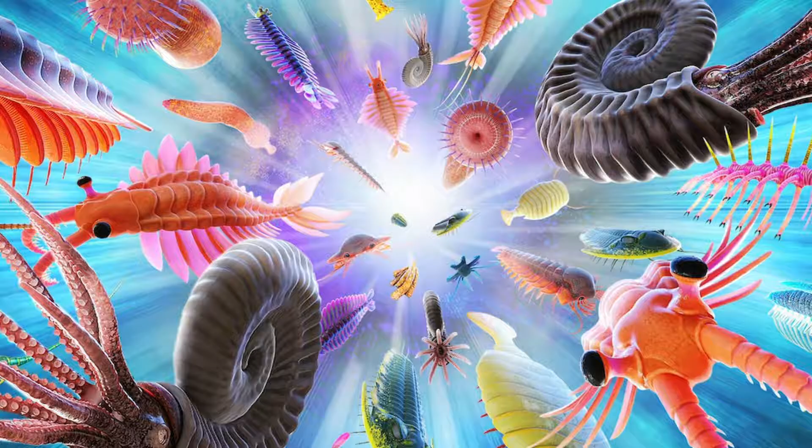Since the Cambrian explosion 520 million years ago, creatures such as Diania cactiformis, or the walking cactus, have developed external exoskeletons to protect them from the concurrent rise in predation at the time. Arthropods quickly followed suit, securing their place as the most abundant animal group on the planet.

Approximately 520 million years later, in 1847, Sir Richard Owen coined the term exoskeleton to describe the external covering of invertebrates for support and protection.

Unfortunately, for larger creatures, muscle strength doesn't scale proportionately with size. And because the relative weight of an exoskeleton is much greater than that of an endoskeleton comparative to a creature's size, at a certain size, exoskeletons become too heavy for a creature to move efficiently, and therefore rarely survive the process of natural selection in animals larger than the crab.

Except in the case of Arthropleura, but luckily for us they've been extinct for 290 million years, so we never have to think about them again. Because of this scaling inefficiency, it took a few decades after Sir Owen's popularization of this concept for the first exoskeleton designs to find their way into the patent office, where the best of capitalism's technological progress can be found.

The year is 1890. Alice Sanger has just become the first female staffer in the White House. 24 tornadoes appear in Mississippi, killing over 146 people, and the Sleeping Beauty Ballet is premiering at the Imperial Mariinsky Theatre in St. Petersburg. Just down the road, a young inventor by the name of Nicholas Yagn has just patented

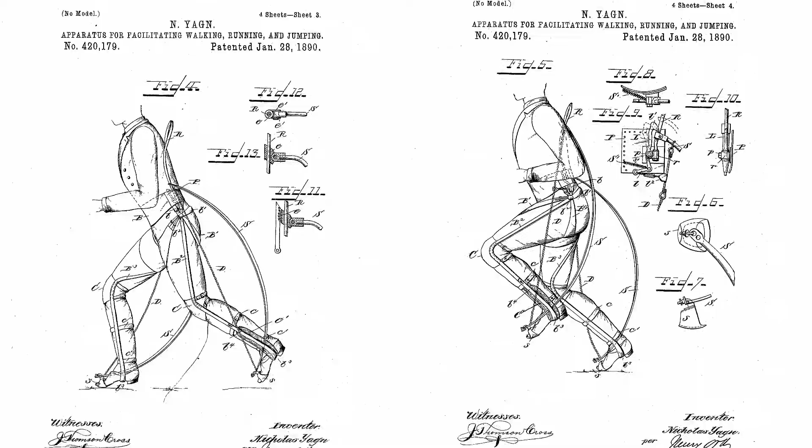the first recorded design of an exoskeleton, a lower limb exercising apparatus employing a leaf spring operating in parallel to the legs to augment the operator's ability to run faster and jump higher. In a sense, Yagn had attached an archery bow to each leg.

Though initially unpowered, Yagn's designs marked the first foray into technical augmentation of human abilities, and a later patent in the same year saw compressed gas bags to store the energy attached to the back, filling as the foot falls, creating pressure in the bag, then said pressure being released as the operator lifts their foot from the ground.

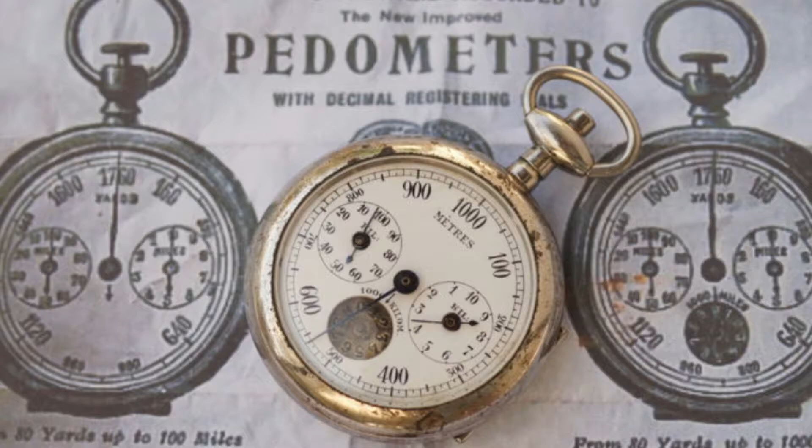27 years later, in 1917, Leslie C. Kelly patented her improvement on the pedomotor, or walking machine. The proposed design provided relief to muscles during running using a small steam engine worn on the operator's back. The artificial limbs worked in parallel with the human's limbs, like Yagn's apparatus, but were directly connected to the power source. However, this design was never released, and it would take another 40 years for an update to be released in this emerging field.

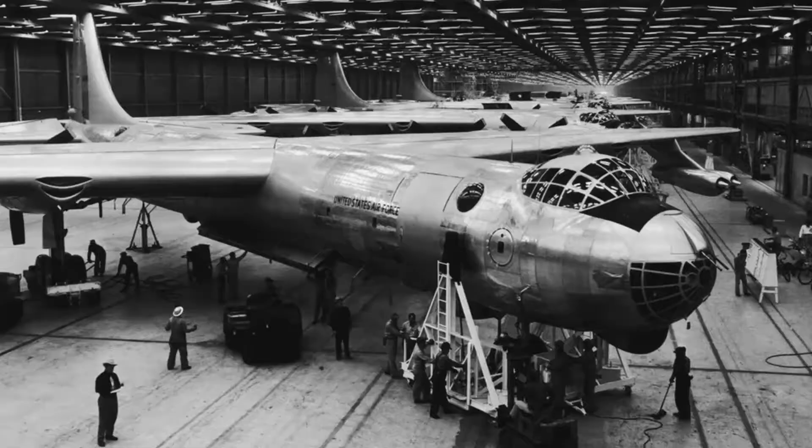In Schenectady, New York, 1946, the Atomic Energy Commission and the United States Air Force began their joint AEC-USAF nuclear propulsion program to determine the feasibility of nuclear energy for the propulsion of aircrafts.

Unfortunately, at the time, nuclear reactors ranged from the size of a truck to the size of a large truck, and so the General Electric Company, or GE, was hired to take these experimental designs and make them a reality in the form of a modified Convair B-36 Peacemaker, a high-tech strategic bomber, chosen for its abnormally long wingspan, clocking in at 230 feet, or 70 meters.

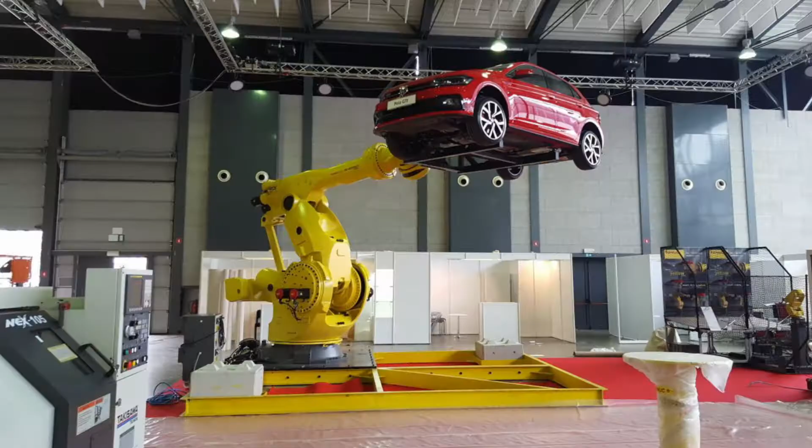During these atomic experiments, General Electric were burning through their government-issued super soldiers to lift their nuclear equipment, so they began development on a tool that would allow the engineers to handle heavy and potentially volatile equipment with greatly amplified strength without sacrificing their dexterity. GE called these new tools CAMs, or Cybernetic Anthropomorphous Machines. But after 12 years of development, they always ended up too clumsy and inefficient for practical use.

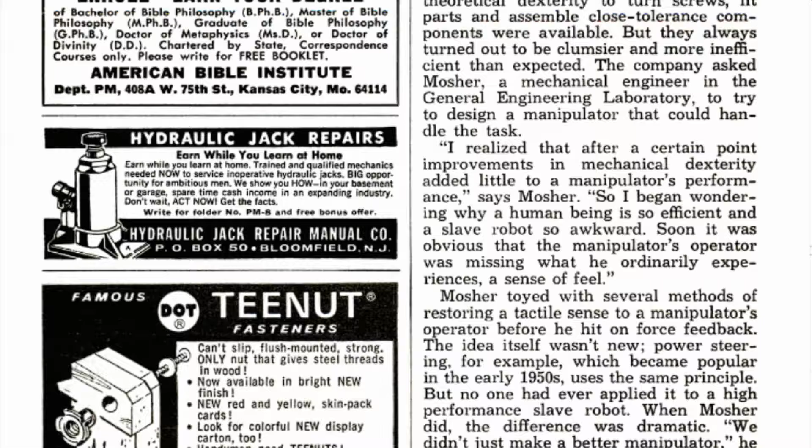Enter Ralph S. Mosher, General Electric lead engineer and the father of powered exoskeletons. To this partial failure, Mosher said, "I realized that after a certain point, improvements in mechanical dexterity added little to a manipulator's performance, so I began wondering why a human being is so efficient and a slave robot so awkward. Soon it was obvious that the manipulator's operator was missing what he ordinarily experiences, a sense of feel."

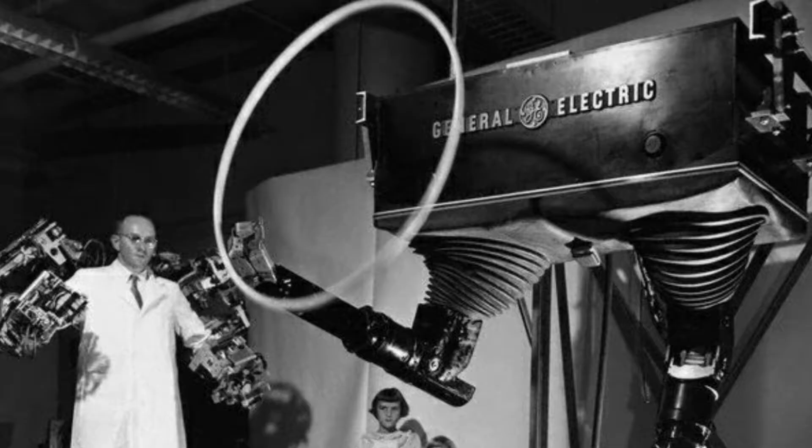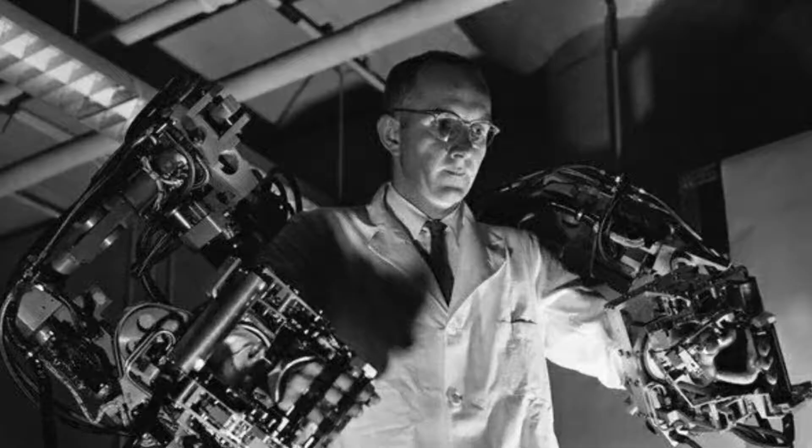And with further funding of the AEC-USAF nuclear propulsion program, Mosher revealed the Handyman, a pair of claw-tipped robotic arms hooked around the operator's shoulders. The Handyman met all the requirements General Electric wanted from their cams: strong enough to crush golf balls, sensitive enough to pack eggs, and dexterous enough to light matches.

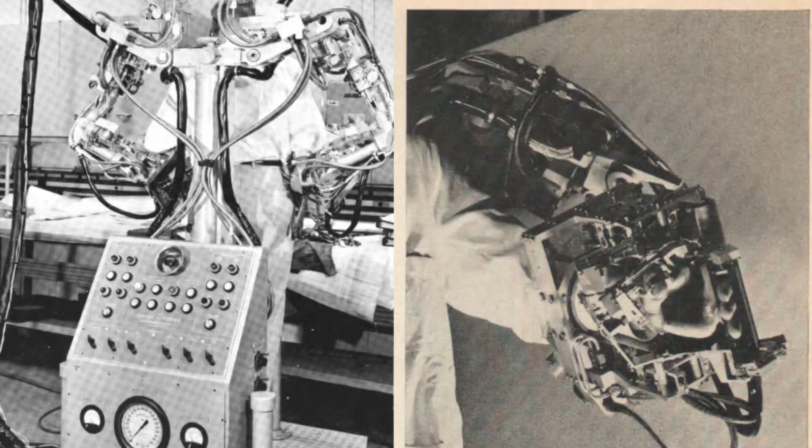Despite this incredible advancement, the Handyman had its drawbacks. The force feedback electronics were bulky and complex, with heavy robotics attached to both external machinery and the operator's back. The servos and racks were highly specialized and inordinately expensive, unable to be produced to any noticeable scale. These drawbacks and the current technology prevented any feasible or realistic plans for continued development.

The US military, best known for their rambunctious attitude, tactical military operations and impressive budget, has a history of unique expenditures, consistently attempting to blur the line between reality and science fiction in the name of security and defense. One such foray into the future was their continued funding of General Electric's work, with Mr. Mosher at the lead, who too was discovering his passion for expanding the limits of human capabilities.

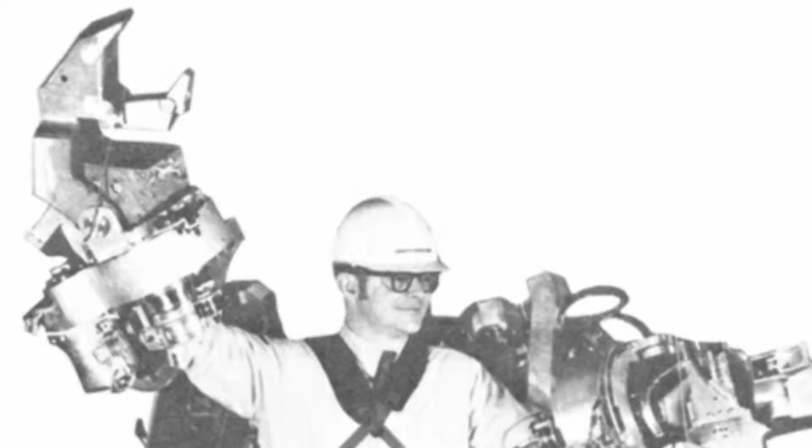Starting in 1965, Mosher began his work on the Handyman's successor, the Human Augmentation Research and Development Investigation Man, shortened to the Hardiman. During the first year of research, Mosher focused on human factors to provide machinery with human-like action that mimics an operator's natural motion. The original design incorporated an internal exoskeleton to record movement attached to the operator, and an external exoskeleton to recreate the operator's movement. Each internal exoskeleton joint had a duplicate on the external exoskeleton, geometrically superposed so that the corresponding joint axes are approximately collinear.

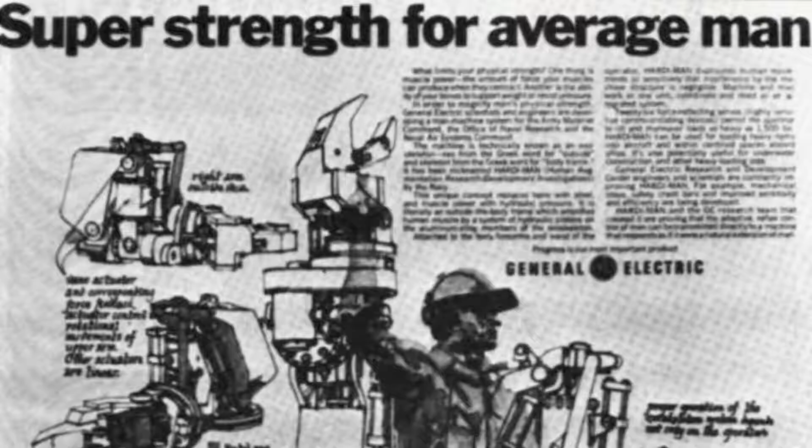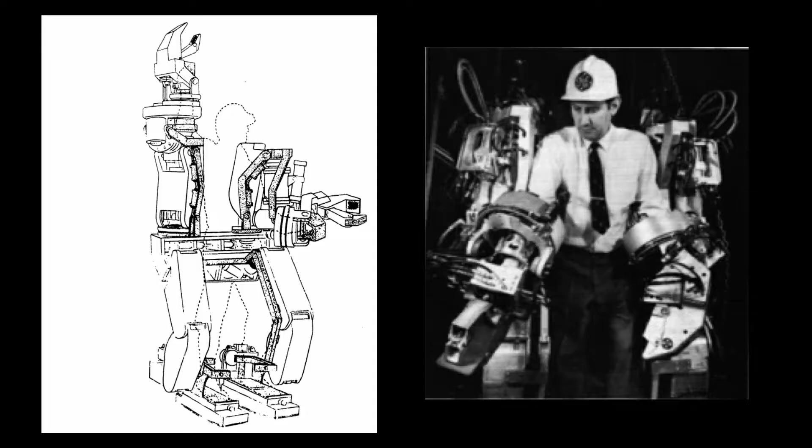To reduce forces experienced by the operator, the Hardiman used large bilateral servos reflecting the movement of the operator onto the external exoskeleton, and reflecting the working forces back onto the operator reduced by a factor of 25, so the operator can sense the forces on the machine as it's working. The design possesses no complex controllers, a large issue with the Handyman, or exposed limbs, as the operator stands inside the structure, surrounded and protected by it.

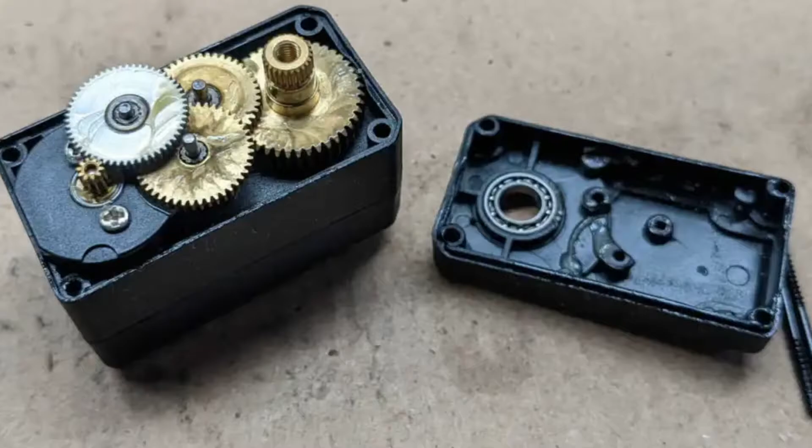It was after this first year it became clear to Mosher that the arm and leg systems must be split up due to practical considerations related to the build-up and compliance of servo systems. Problems with these servo systems continued, as GE had not yet succeeded in developing a complete hydromechanical servo system to the point where it could handle the exoskeleton's requirements.

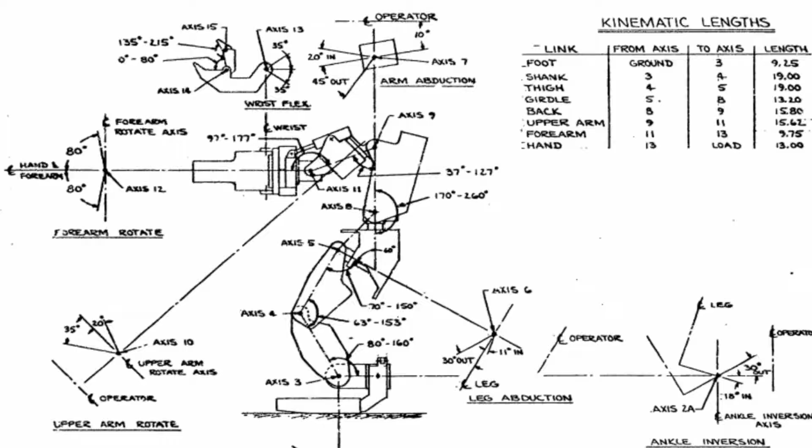Because of these issues, the Office of Naval Research, who was also involved somehow, directed the program to focus on the arm systems, as it involved lower risk, and Mosher recognized that a demonstration of its success was essential to continued support of the program, and by the end of 1969, they were finally complete.

Following this success, in the early 70s, the leg system was almost finished, and although initial tests were encouraging, funding was running out, so the final product was presented, which achieved limited success in walking. The machine responds to the man's motion, but the operator could not balance or walk without external support.

In his paper on the project, titled Handyman to Hardiman, Mosher stated, 'In spite of these achievements and the expectation for continued progress, the difficulties of duplicating many feats of the human brain and nervous system still remain formidable. Consequently, many mechanical operations will not be automated for some time.'

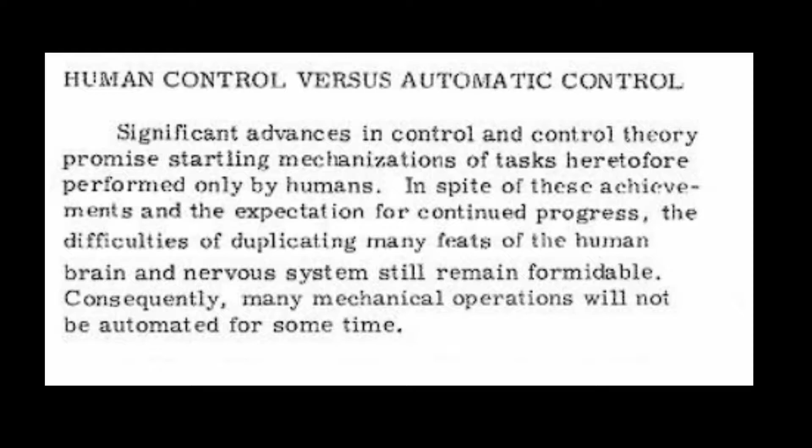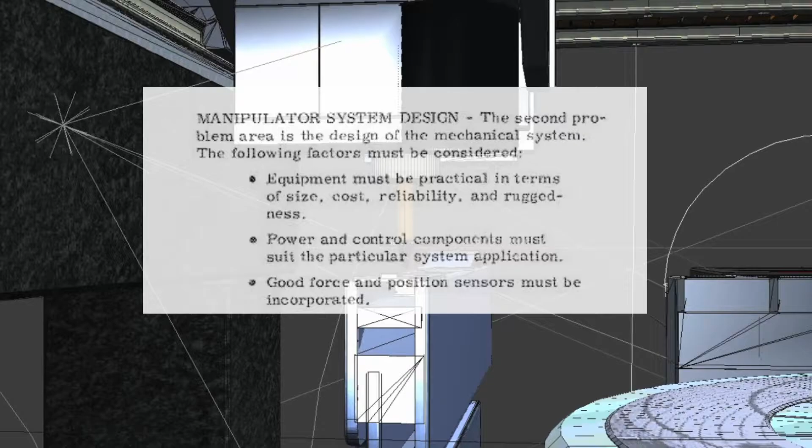He then went on to identify 4 key factors to be considered when designing powered exoskeleton systems. Number 1: Equipment must be practical in terms of size, cost, reliability, and ruggedness. Number 2: Power and control components must suit the particular system application. Number 3: Good force and position sensors must be incorporated. Number 4: Mechanical arm kinematics must be appropriate and adequate.

Although these factors are fairly broad, they set effective base rules for the design and production of exoskeletal systems, still followed to this day. Later in the paper, common usage of these systems were described as being for military use, bomb handling and heavy loads.

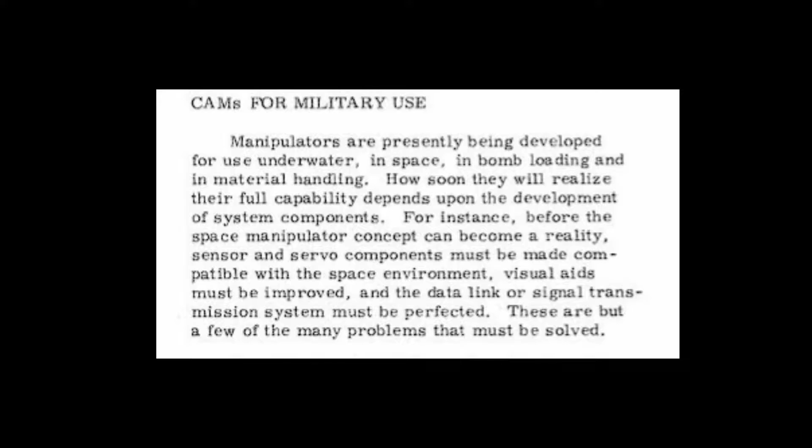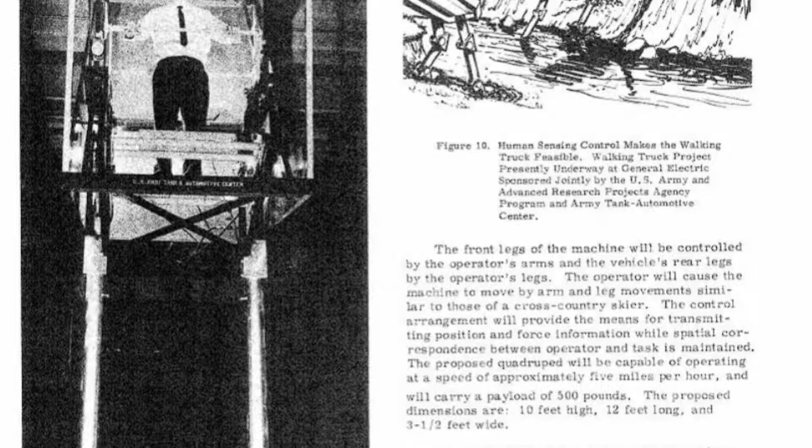Mosher unveiled a bonus system in the form of the walking machine, standing 10 feet high, 12 feet long and 3.5 feet wide. These quadruped monstrosities would travel at 5 miles per hour and carry 500 pounds of load, with the front 2 legs controlled by the operator's arms and the back 2 controlled by their legs.

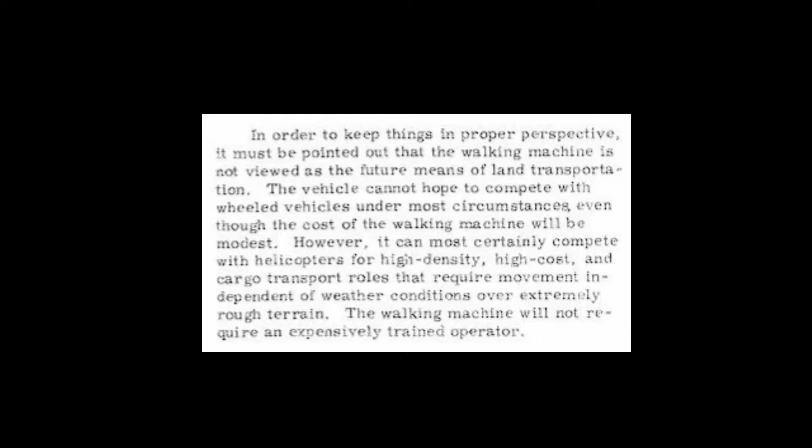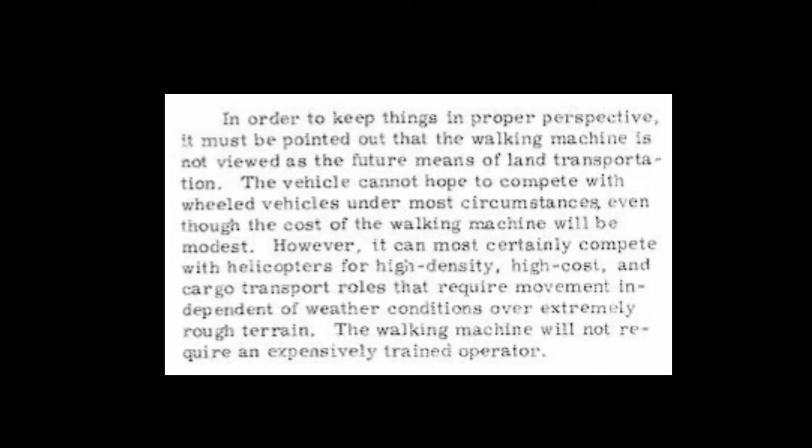To clarify his sanity, Mosher went on to say, 'In order to keep things in proper perspective, it must be pointed out that the walking machine is not viewed as the future means of land transportation.' And then inexplicably he goes on to say, 'It can most certainly compete with helicopters in cargo transport roles that require movement independent of weather conditions over extremely rough terrain,' touting its ability to be piloted without expensive training and its relatively modest production costs.

Mosher continued to predict that in the future, the Hardiman's operator will react in such a natural manner that he subconsciously considers the machine as part of himself. He continues, 'It is conceivable that a 20 or even 50-foot tall Hardiman can be built with the operator inside as the brain or controller, with force and position information being scaled down accordingly,' which is wild.

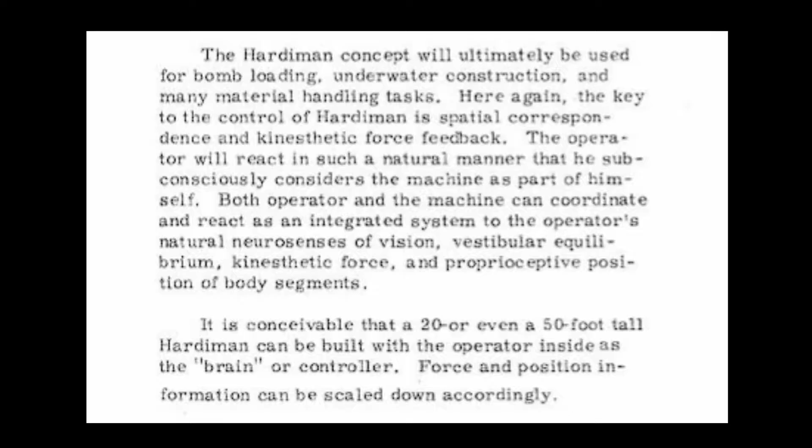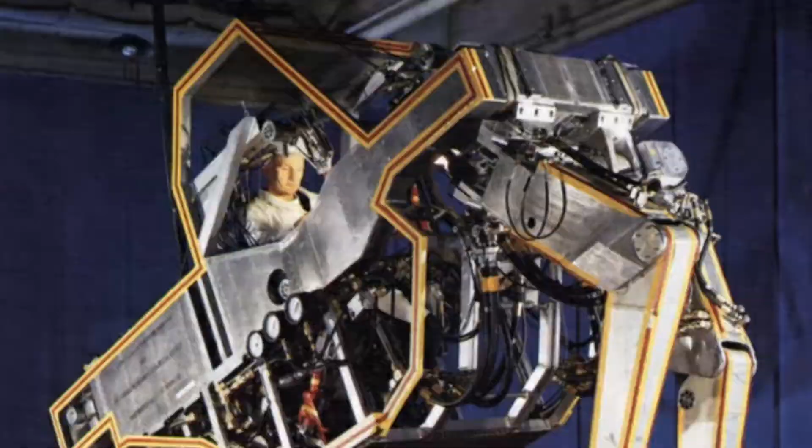Though the Hardiman wasn't entirely successful in the form of a fully functional, powered exoskeleton capable of remote operation as was initially intended, it was proven as a viable solution to operating in extreme environments, bomb loading, material handling and cargo transportation over rough terrain, which Mosher believed would be realized in some form in the near future.

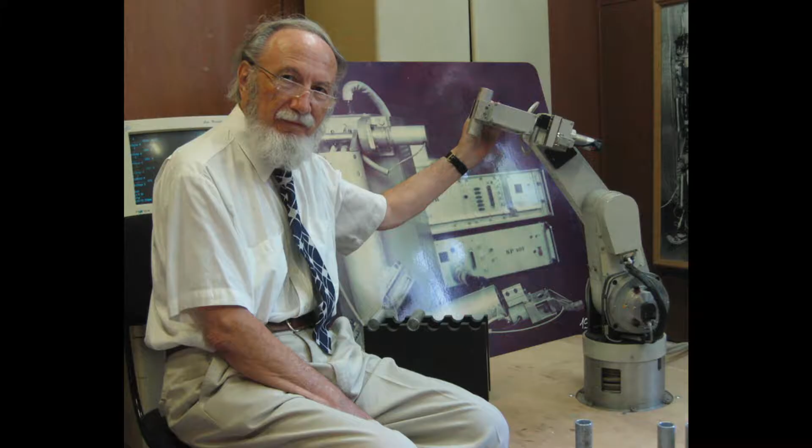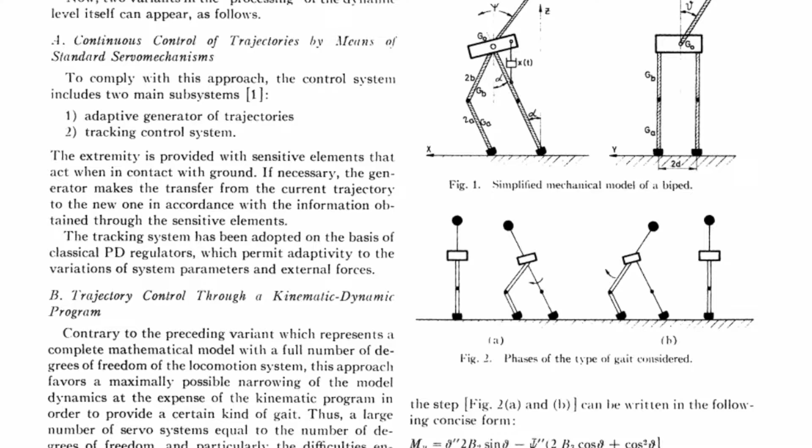Across the world in what was once Yugoslavia, at the Mihajlo Pupin Institute, Miomir Vukobratovic began work on his kinematic walker. Featuring a hydraulic actuator to drive hip and knee movement, the initial design quickly evolved into the partial active exoskeleton, switching to pneumatic actuators to control movement of the hip, knee and ankle, as well as abduction and adduction at the hip for greater frontal plane stability.

The design was then further modified into the complete exoskeleton by extending the torso attachment to enclose the entire chest of the operator. At this stage, more than 100 clinical trials were performed with this device, resulting in a number of patients with varying degrees of paralysis mastering the ability to walk using the complete kinematic walker with the help of crutches for added stability.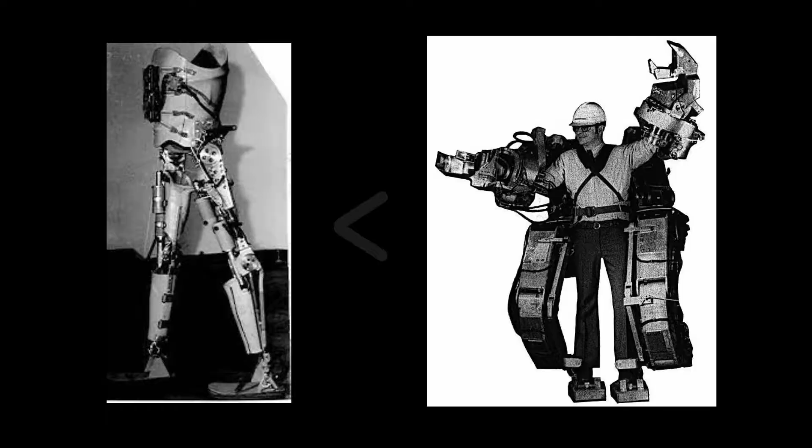Clocking in at 12 kilograms excluding the power source and controller, the kinematic walker weighed roughly 56 times less than the Hardiman, lending itself more suitably to medical rehabilitation rather than industrial activities.

A third modification added 3 piezo-ceramic force sensors into the sole of the exoskeletal feet to determine location and magnitude of the ground reaction force, which was then used to control the device with higher accuracy and improved response time.

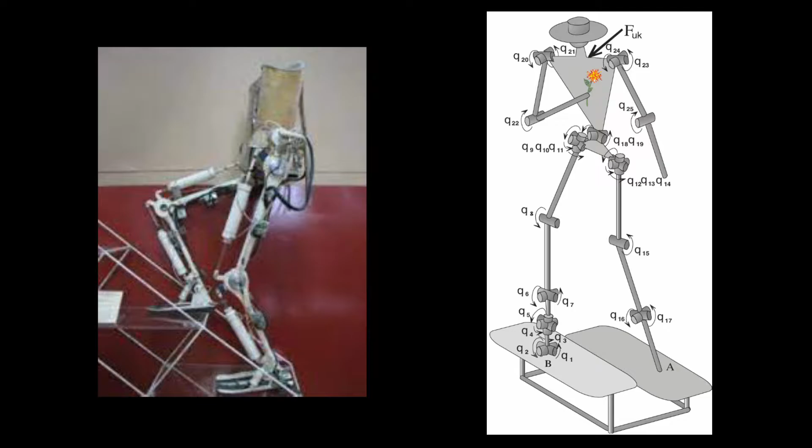The final design incorporated DC motors instead of pneumatic actuation, and despite the limitations of the era's motor and battery technology, most notably their obnoxious sizes, this new actuation scheme still offered smoother motion and better tracking ability.

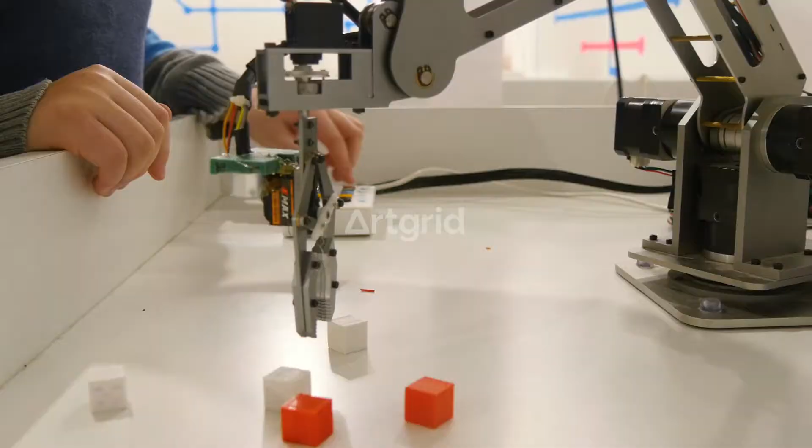Vukobratovic's consistent improvements created a solid understanding of the range of actuation methods available at the time and their related drawbacks. Despite this, it took 15 years for a new exoskeleton design to appear that could challenge the kinematic walker, and boy was it challenging.

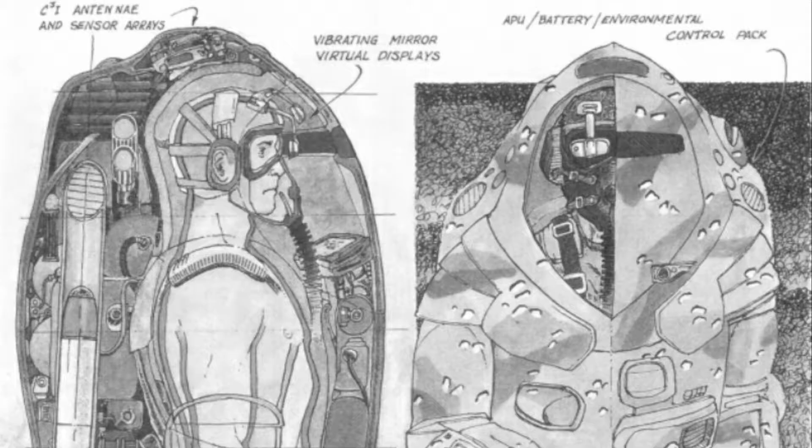Jeff Moore of the Advanced Weapons Technology Group threw his tinfoil hat in the ring with the Pitman, a powered suit of armour for infantrymen. Housed in 500 pounds of fiberglass, ceramic and polymer composite armour, the Pitman was designed with 6 distinct layers.

Starting from the innermost, layer 1 was made of impregnated antibacterial polypropylene, which, as wild as it sounds, PPE, or personal protective equipment, with internal antimicrobial weavings in the form of silver nanoparticles or copper oxide, are being studied for use in health services, so take from that what you will.

Layer 2 was closed cell foam laced with heating and cooling tubing, the effectiveness of which is disputable to say the least. Layer 3 is a sealed impermeable condom layer, assumably as some form of vacuum to limit heat transference to the external layers. Layer 4 contains nitrogen-filled polyurethane bubble sensors, essentially bubble-wrapped displacement sensors to track positional compression and expansion of the suit. Layer 5 was classic energy-absorbing closed cell foam, which exists today to dissipate kinetic energy, usually when transporting fragile materials.

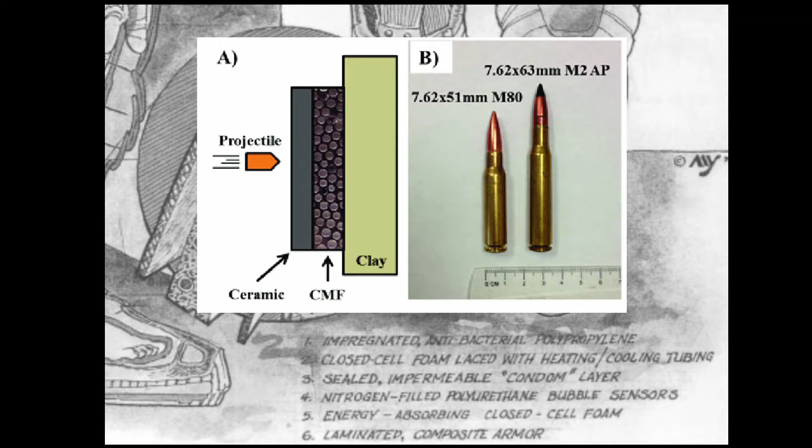9 years later, in 1994, the joint structure and kinematics were still unconceptualized, rendering it, like its designer, truly unhinged. The design's power supply system implemented auxiliary power units, batteries, and environmental control packs to maintain operator comfort, while magnetoencephalographic sensors, or MEGs, monitor brain activity, creating a phantom central nervous system to control the exoskeletal limbs.

Despite the Department of Defense's consistent willingness to fund people who read too much science fiction, even they saw the Pitman as a pipe dream too complex for the current technology and refused to participate in its creation. Despite this, the US military continued to pursue exoskeletons elsewhere as part of the Warrior's Edge initiative, a comprehensive plan to modernize the soldier and maximize his capabilities.

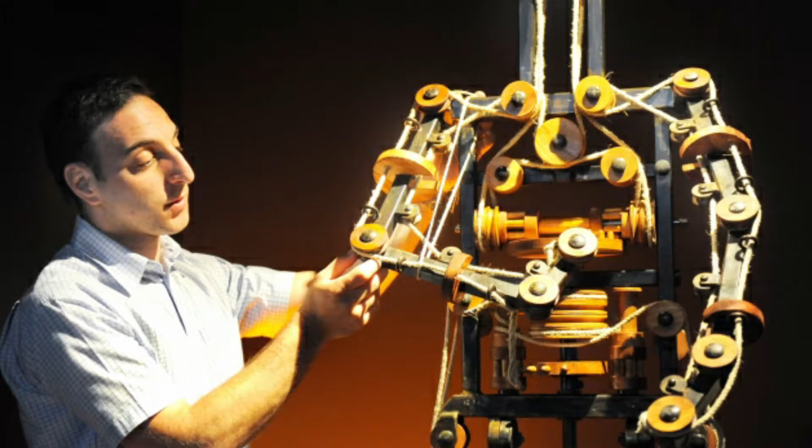During the height of the Pitman ravings in 1989, Mark Rosheim was only 1,231 miles away in Minneapolis, working on his vision for the exoskeletal future, which he called the...

With 26 degrees of freedom excluding the hands, 500 pounds of load capacity, hydrostatically lubricated joints powered by ball screws, and electronic negation of system weight through self-braking non-backdrivable joints, the Man amplifier was also never actually made.

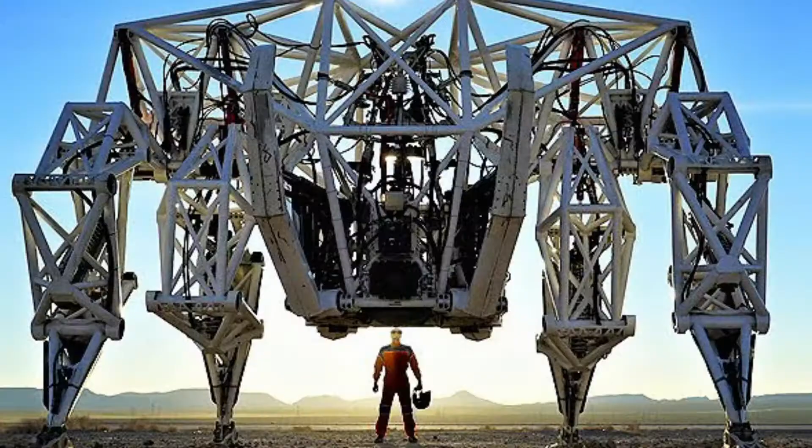In contrast to the Hardiman's bulky and robotic designs, the Man amplifier more closely resembled the operator's joints, making the system inherently more user-friendly and stable.

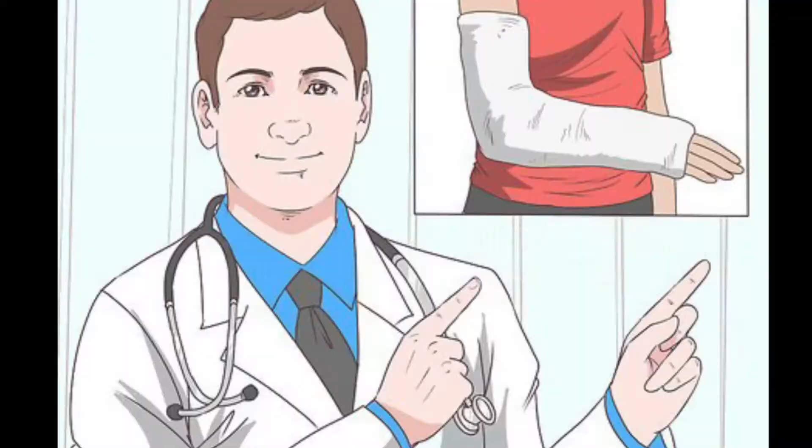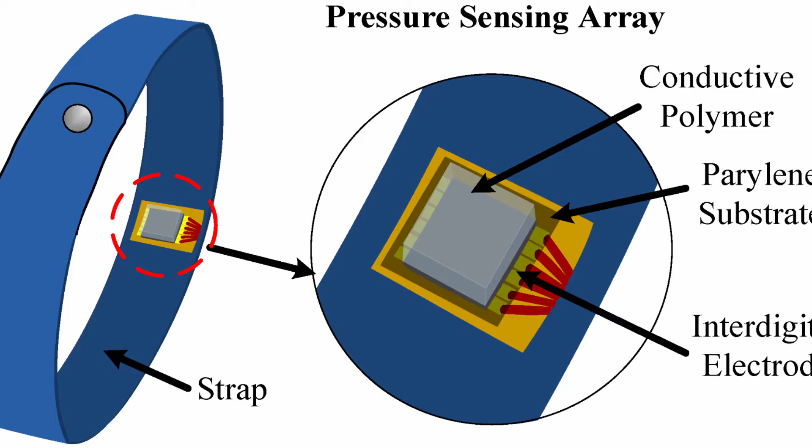The mechanical joints were limited as to not extend past human limitations, and the battery-powered system reduced the system's weight, allowing for more dexterous and precise controls, lending it more naturally to disaster recovery, hazardous material management, and rugged terrain traversal. The operator would step backwards into the suit and load up, where pressure-sensitive cuffs feed signals to the actuator modules to initiate motion in accordance with operator movement, or they would if the device was ever produced.

Don't worry though, because Rosheim was sure to write a book about exoskeletons entitled Robot Evolution, The Development of Anthrobotics. He also published a book called Leonardo's Lost Robots in reference to Da Vinci, which, as irritating as Rosheim's unproduced designs are, I am desperate to read.

Regardless, moving on to an actual, physical, real-life...

Here to carry us into the 21st century is Monty K. Reed. Growing up with learning disabilities, Reed was discouraged from attending university by his high school teachers.

Feeling lost and unsure of his future, Reed joined the US military to jump out of airplanes. During one such event in 1986, Reed suffered a spinal cord injury and was told to accept his new fate of permanent quadriplegia.

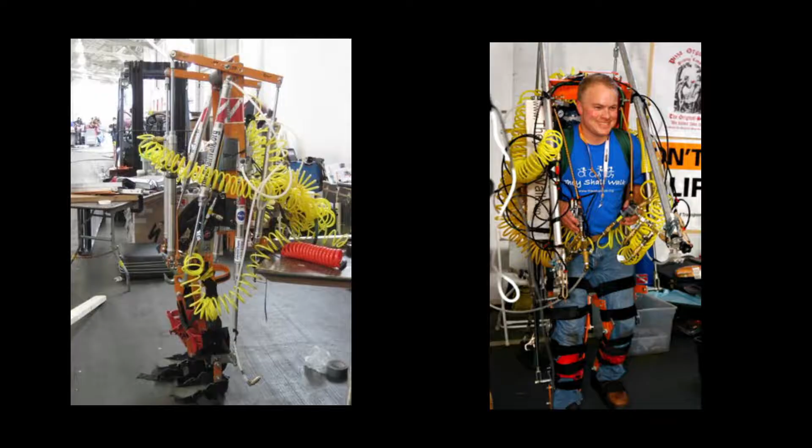Unsatisfied with this prognosis, he began designing the life suit as a cure for his own ailments. As his designs grew in complexity, he became aware of the over 6 million people in the US alone who also lived with some form of paralysis, and through extrapolation, this could represent 2% of the entire world population. To this, Reed stated he quickly realized his mission was far greater than he could have ever imagined.

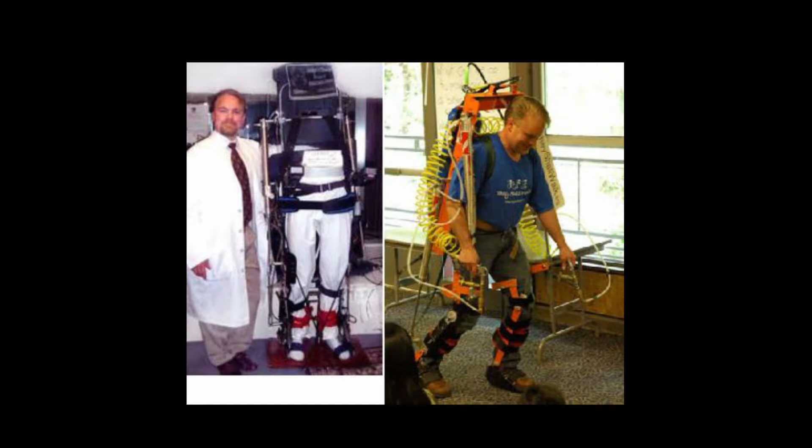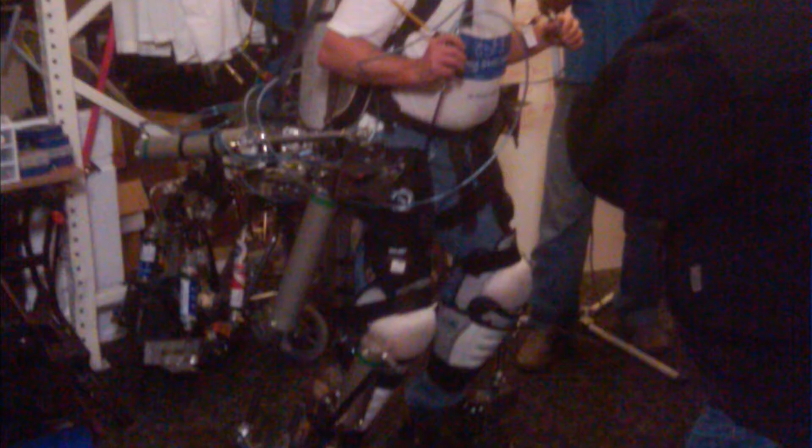A month after his accident, Reed experienced a miraculous recovery and no longer needed this technology for himself. Despite this, he continued to develop 24 prototypes between 1990 and 2014, each iteration an improvement on the last. The first life suit, LS-1, was the first exoskeleton Reed designed connected to a microcontroller, evolving through to LS-16, a CAD-designed rehabilitative therapy model with chassis, electronics and software all produced by specialist organizations individually. Reed continues to support the exoskeleton field with competitions, new prototypes and his life suit therapy clinics, providing rehabilitative technology and support to those in need.

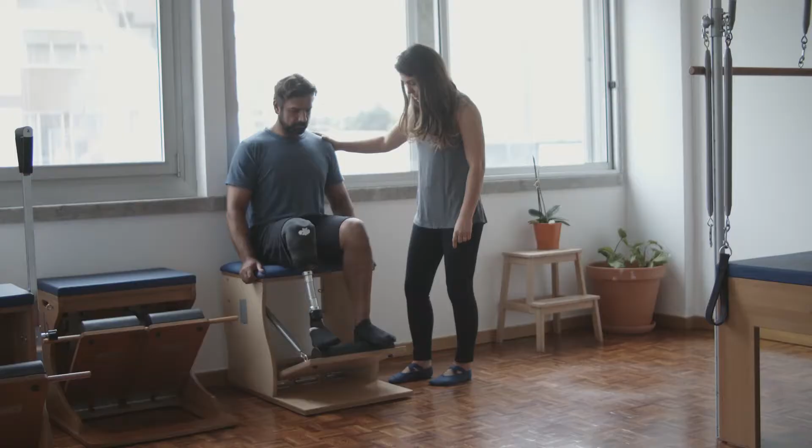The life suit's development marked a shift in exoskeletal technology away from militarized suits of war and towards assistive and rehabilitative engineering to protect the lives of those suffering, instead of...

BLEEX, $11 million. Oak Ridge Labs, $8.5 million. Millennium Jet, $5.1 million. Sarcos, $9.9 million. Arthur D. Little, $2 million. M Aerospace, $1.7 million. MIT, I couldn't find the budget, but it was probably very high.

The US Defense Advanced Research Project Agency, or DARPA, began funding exoskeletal development yet again in 2001 with a new and improved budget of $50 million. $38.2 million of which was recorded to be spent funding exoskeleton development split between the aforementioned organisations, and the rest we can only assume went to a noble and trustworthy cause.

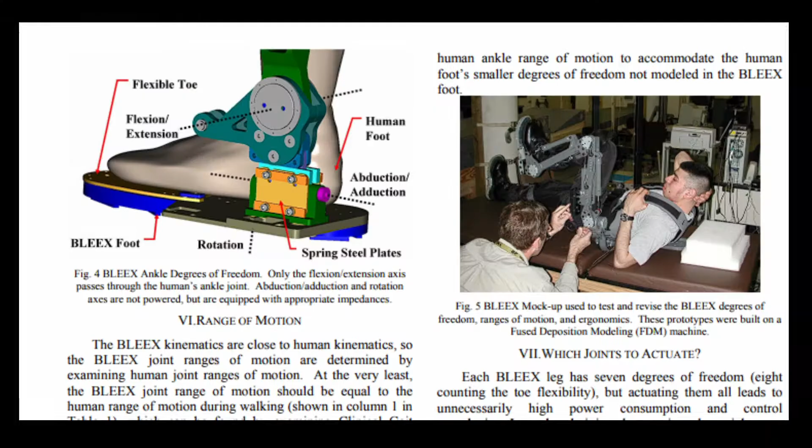Starting with Berkeley College, the BLEEX, or Berkeley Lower Extremity Exoskeleton, claims to be the first load-bearing and energetically autonomous exoskeleton. With 3 degrees of freedom at the hip, 1 at the knee and another 3 at the ankle, BLEEX provides the wearer with the ability to carry significant loads on their back over all terrains with minimal effort.

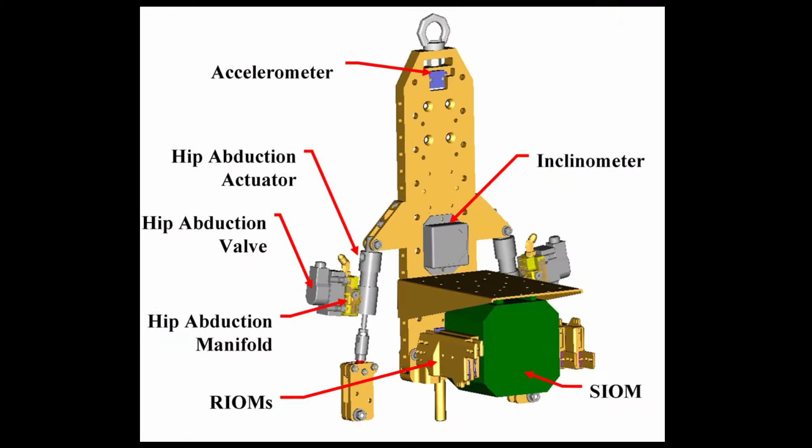With 2 powered anthropomorphic legs, a power supply and a backpack-like frame for payloads, BLEEX is said to be guided by human interaction, shadowing the operator's movement as they wear it. Weighing 48 times less than the Hardiman, but actually existing this time, BLEEX cannot crush golf balls, but fulfills Mosher's dream of tough terrain traversing technologies.

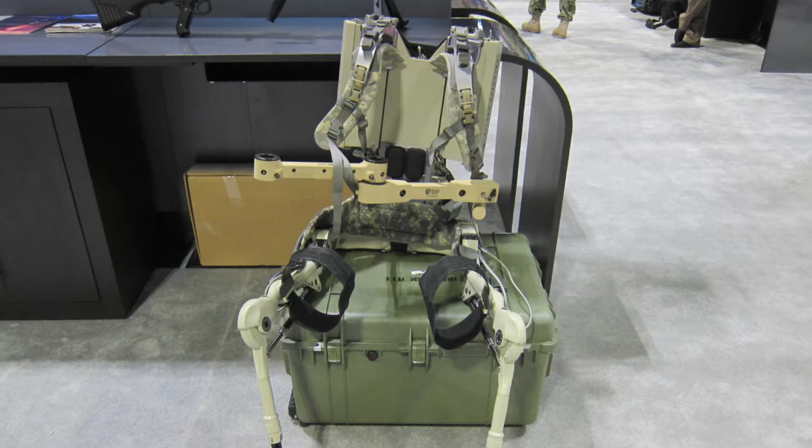Though BLEEX was promising in testing, it still faced concerns in its highly sensitive control scheme, static limb length, and unrealistic leg joints. Development moved away from Berkeley College to Lockheed Martin for further improvements, now known as the Human Universal Load Carrier, or HULC.

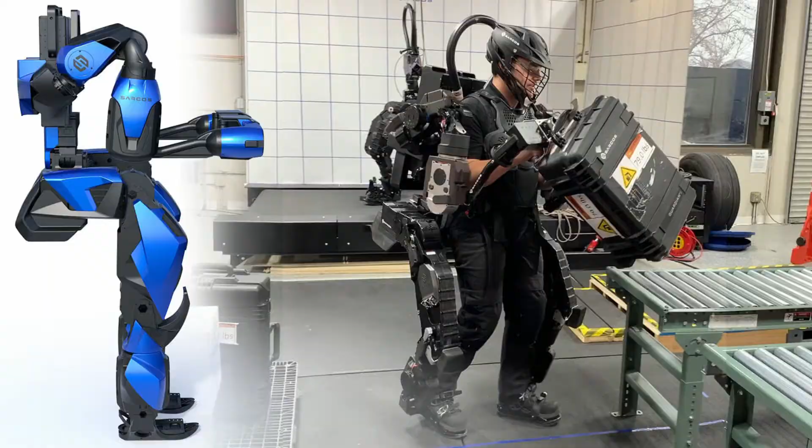Across the road in Salt Lake City, where the grass is green and the parks are fine, the Sarcos exoskeleton took greater inspiration from the Hardiman, a battery-powered, full-body exoskeleton that could amplify operator strength by up to 20 times, with user-selectable end effectors and redundant hardware for passive braking.

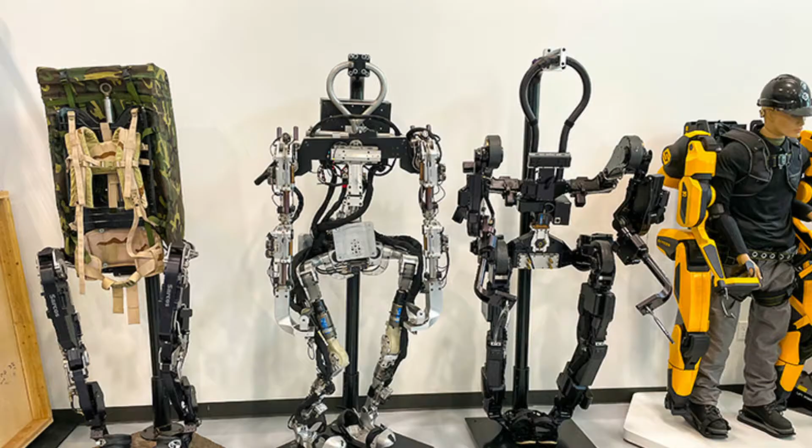The Guardian XO, though it has some pretty impressive stats, is not nearly the most prominent or impressive exoskeleton on the market as of mid-2022. That award is currently being fought over by a selection of corporations dominant in the market and a gaggle of newcomers vying for the throne.

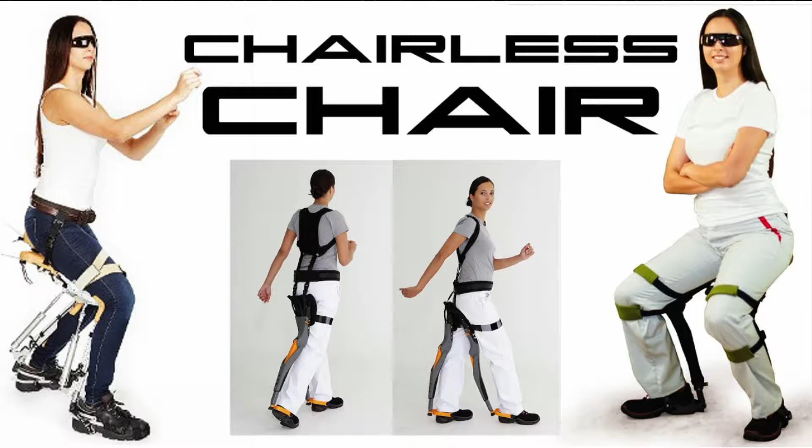Starting off simple, the chairless chair is a chair sans chair. The lightweight exoskeleton snaps into place as its user bends their knees, distributing its weight such that the user is supported in a sitting position.

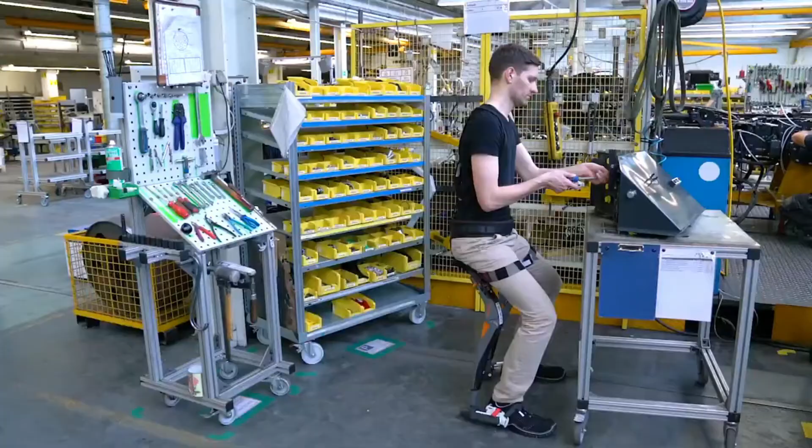It takes 30 seconds to put on and is advertised to maintain concentration and productivity, and reduce costs for days of absence. These have been employed in an increasing number of organisations across the automotive industry and beyond, and reveals the first hint of a red flag towards the ethical issues of exoskeletons, where robotic enhancements are advertised to the corporation instead of the worker, potentially promoting a less humanising view of one's employees, or refusing an employee the right to work without robotic enhancement.

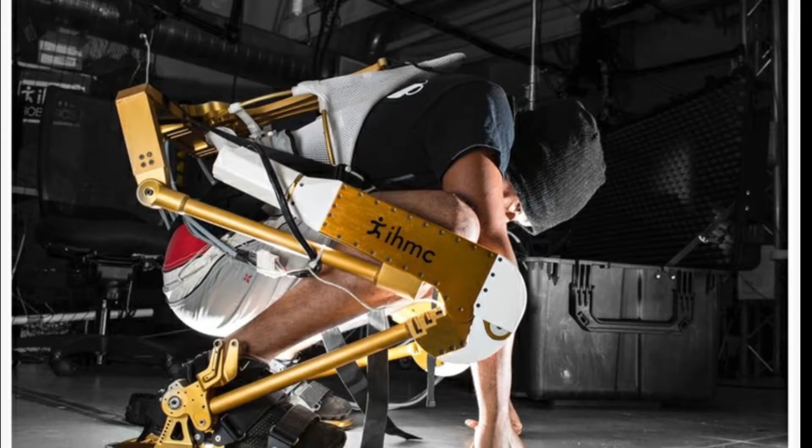Upon further research, the Grasshopper does not allow its operator to jump approximately 20 times their body length in height. Instead, the Grasshopper is designed to address muscle and bone density loss in astronauts spending extended periods of time in zero gravity. Funded by NASA, the Grasshopper is a high-tech squat machine with an actuator in each knee joint, providing artificial, variable force feedback in zero Gs without the need for a spotter.

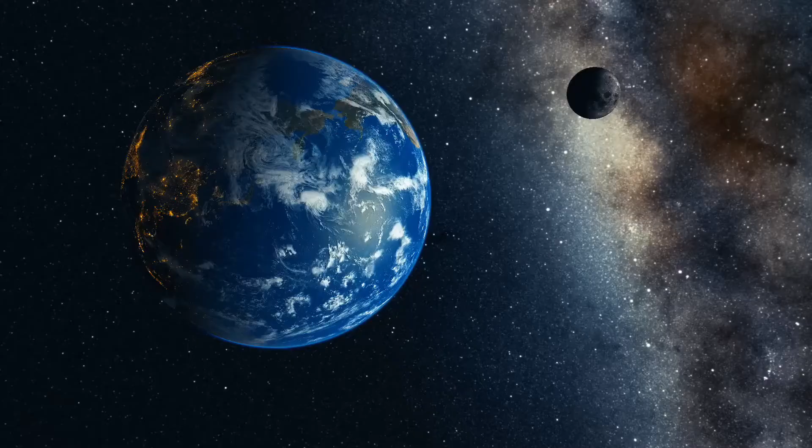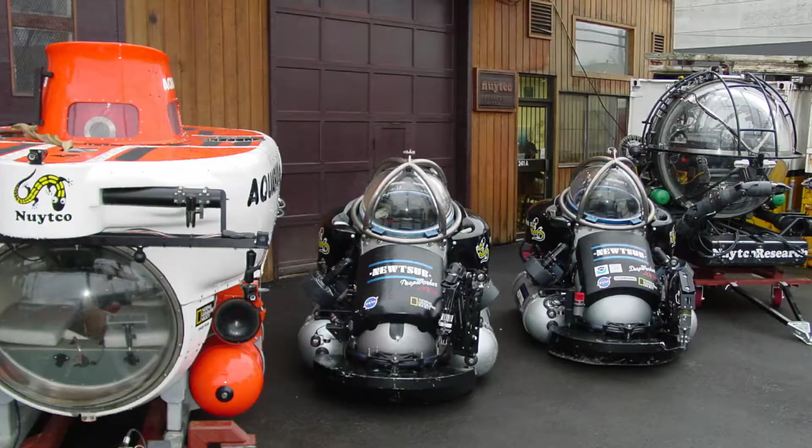From the highest of highs in space exploration to the deepest depths of the ocean, Dr. Phil Nuytten began his career by designing diving equipment in Western Canada. His equipment was so innovative that over the years he worked for commercial, scientific and military industries designing deep water diving equipment and technical diving techniques.

Nuytten's most recent endeavour has been to build an underwater human settlement off the coast of Vancouver powered by Stirling engines with hydrothermal vent sources.

Nuytten's second most recent endeavour was called the Exosuit, an ultra-lightweight, powered exoskeleton capable of operating safely at a depth of 1,000 feet. The suit weighs 600 pounds, reducible to 500 depending on the end effectors. With 2 redundant oxygen systems and a high-density CO2 scrubber, the user has 50 hours of total breathing capacity underwater. The suit has 4 1.6 horsepower thrusters, expandable to 8 upon request, and with gigabit Ethernet capability, high-definition cameras, and ImageNex 852 sonar, the suit is capable of transmitting everything it sees and more.

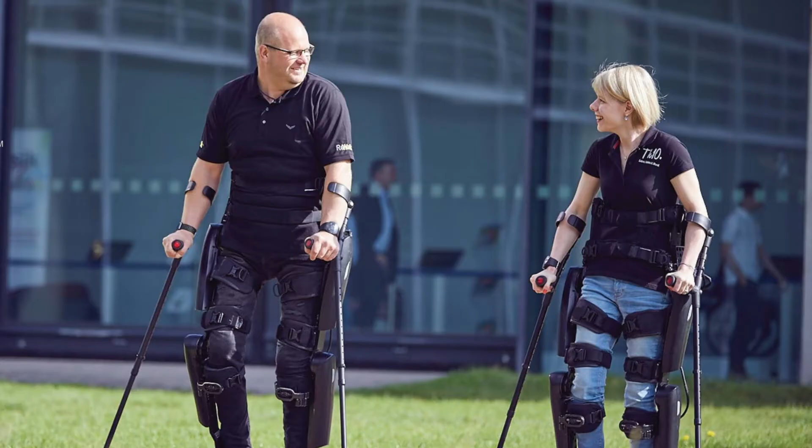Air, sea and now land, Rewalk's Rewalker is a more down-to-earth exoskeleton, designed to be user-friendly and affordable to provide assisted rehabilitation for those living with spinal cord injuries. Battery-powered with motors at the hip and knee joints, the Rewalker senses changes in the operator's center of gravity, initiating movement in accordance with this shift, generating a sequence of assisted steps to mimic the operator's natural gait.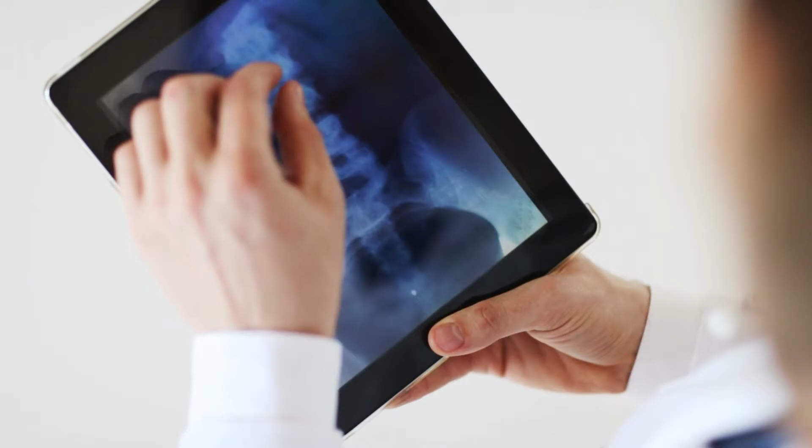This system is not without its restrictions though. The operator must be in general good health, with a weight lower than 100 kilograms, a height between 160 to 190 centimeters, healthy bone density and an unfractured skeleton.

At this point it should be noted the difference in safety standards between industry and medical exoskeletons. Should the same restrictions be placed on exoskeletons in industrial use? Would this reduce working opportunities for those who exceed the weight or height limitations? Comment down below if you really think your opinion is worth something in this discussion, but really think about it.

Just take a look at this.

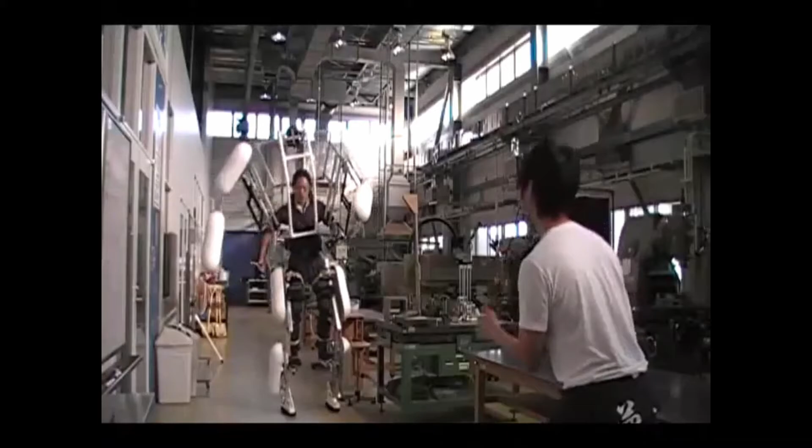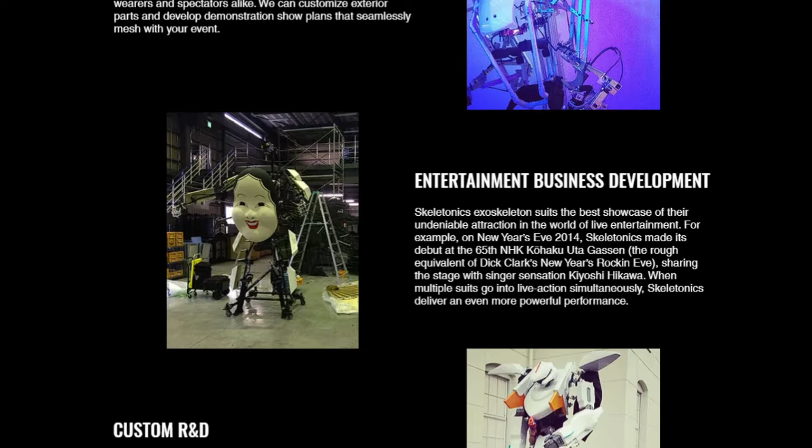Team Skeletonics is a group of award-winning inventors who create rideable robots. Based in Tokyo, their most recent design, Product 5 Skeletonics Arrive, is 9 feet 2 inches tall with a connected upper and lower body. Offering reduced burden on the wearer and suit-up time compared to previous models, Skeletonics currently offers exhibition rentals with custom-designed exoskeletons on request, altering the frames, circuitry, lights and sounds to the user's specifications.

Mirror technology is used to recreate the operator's movements, while more advanced mechatronics are used to control the fingers with a greater degree of precision. In public knowledge, these devices have never been used to stop crime or fight dinosaurs, but hope remains for the future of Skeletonics.

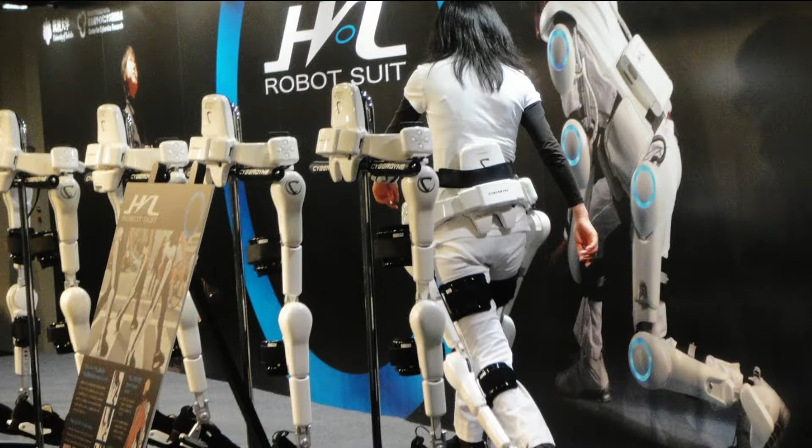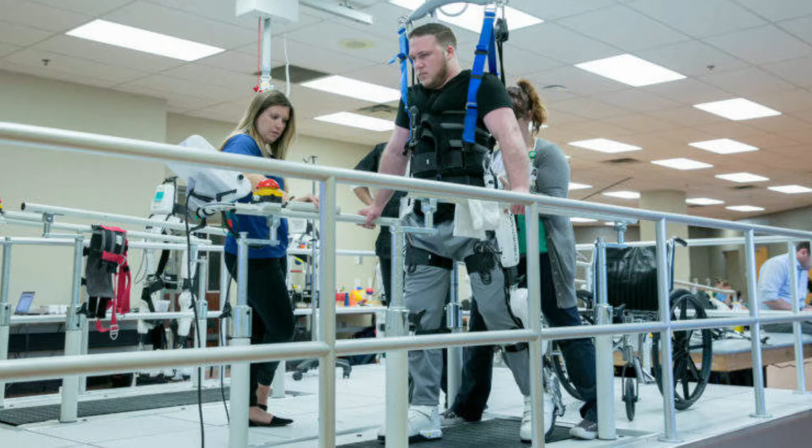Advertised as the world's first technology that improves, supports, enhances and regenerates the wearer's physical functions according to the wearer's intentions, Cyberdyne's wearable cyborg is a marvel of current exoskeleton technology. Designed primarily to improve physical function in welfare and medical fields, it has proven highly effective for heavy load lifting in the workplace. Most of Cyberdyne's commercial products monitor myoelectric signals to record the user's intent to control device movement.

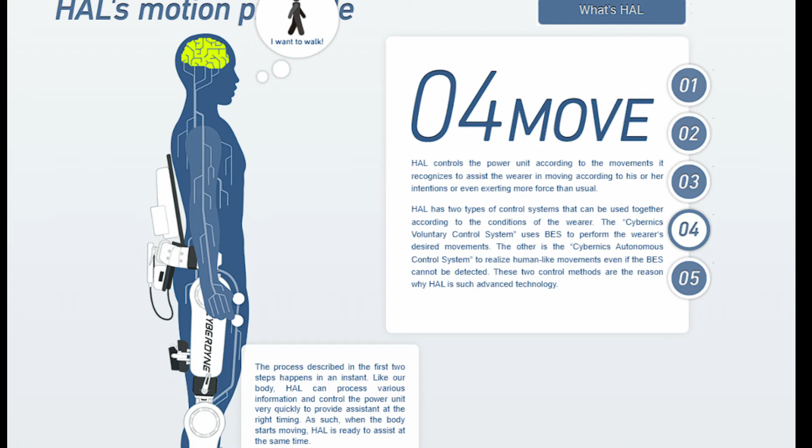Via some pretty advanced signal processing techniques, signal noise is all but eliminated, and the remaining electrical signals are translated to device movement. This may sound inaccurate, but combined with a series of learning algorithms that map intended movement to signal strength and location, the accuracy of movement reflection will increase with continued use.

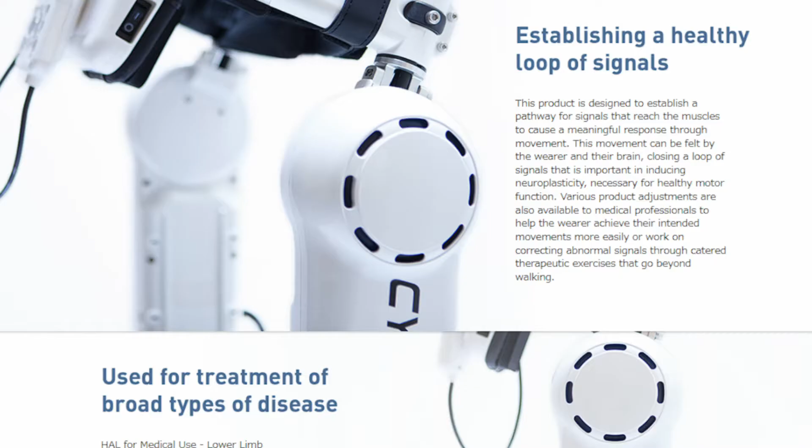Cyberdyne has a variety of products, most notably their HALs, or Hybrid Assistive Limbs, designed for medical rehabilitation and well-being. The company was established in 2004 as a university venture to solve various social problems facing the aging society and continues to work on cybernetic systems focusing on medicine, welfare, life and the workplace.

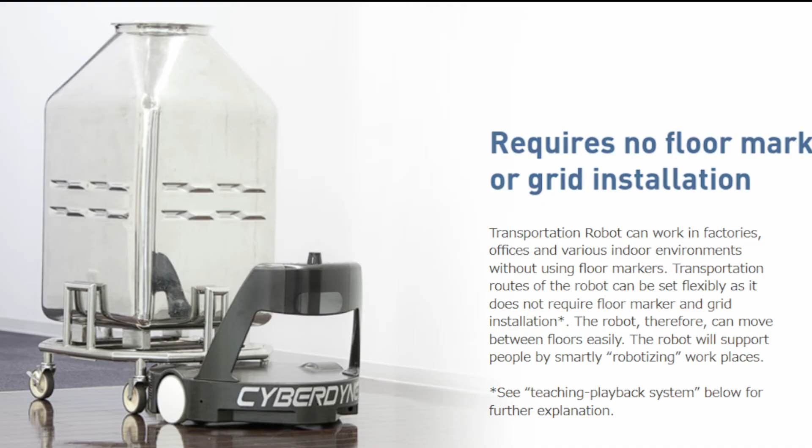They even have a few non-medical devices like the MBCL02 cleaning robot with elevator capabilities, the No Boundaries transportation robot, and the high-speed light pulse LED array light source that enables real-time photoacoustic imaging, known as the Acoustic X.

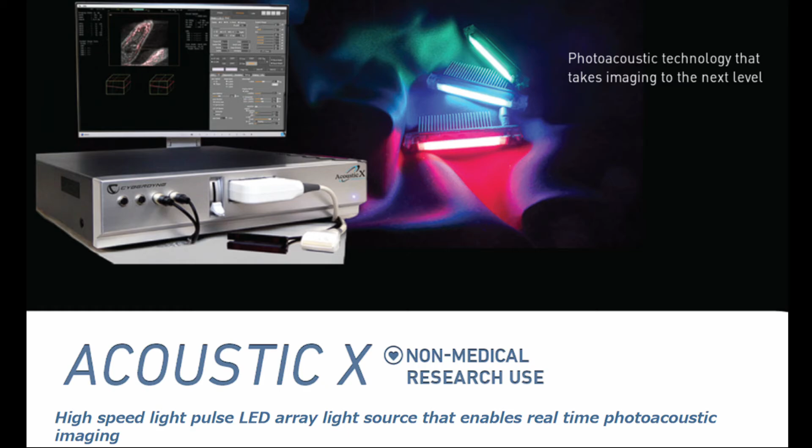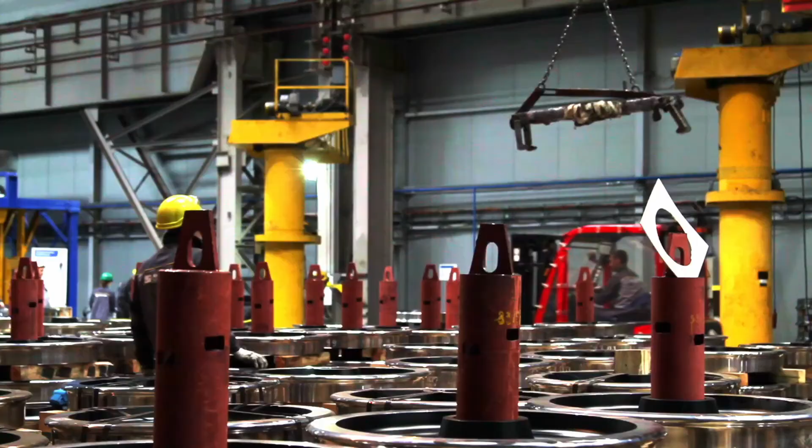Speaking of high speeds, the global wearable exoskeleton market's compound growth between 2018 and 2028 is estimated to be 43.48%, hitting $5.4 billion by 2028. This growth is being attributed to quick technological advancements and increasing demand from military, industrial and medical markets.

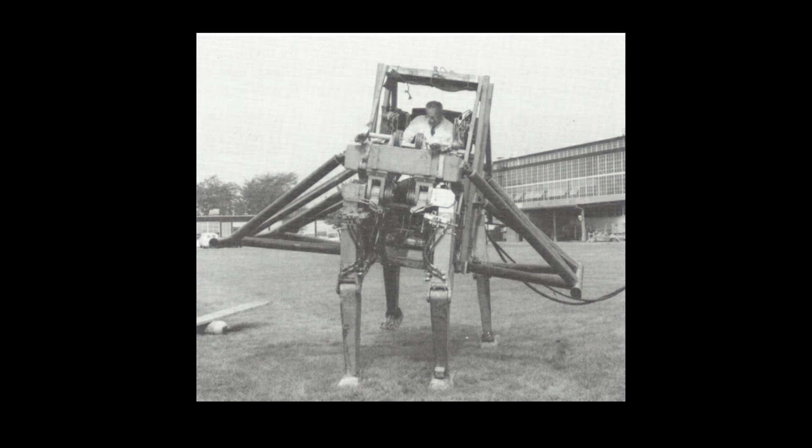The cost of both designing and developing exoskeletons remains high. Power units are bulky and limiting in their operation time, and with academic articles trailing far behind commercial development, it seems that it might take a little more technological development before exoskeletons are present in industry, healthcare and warfare to the extent that Mosher would have wanted.

There are a whole host of social, legal, and ethical issues surrounding the integration of robotics into healthcare and the workplace, ranging from the dehumanization of workers to the perpetuation of an extreme class divide. So, if you want to hear about the potential dystopia these developments could plunge us into if not done properly, let me know down in the comments below.